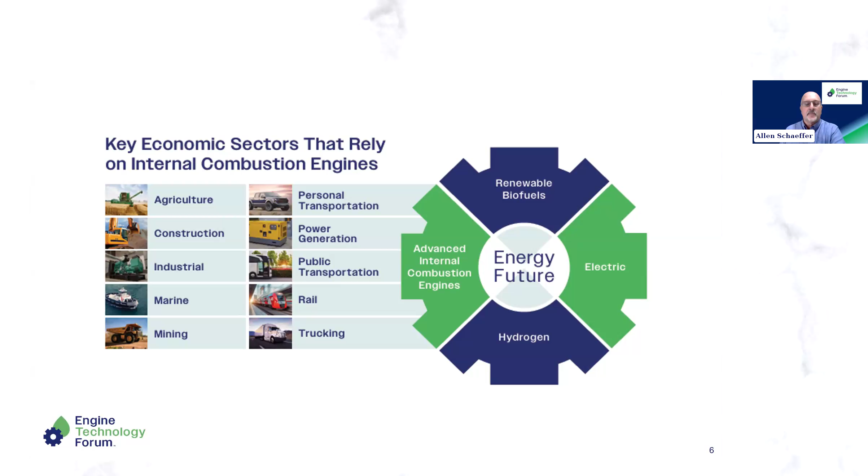And that's because of several reasons, which we are going to get into today, and that is the increased efficiency of the technology, its ability to achieve even lower emissions, and the role that sustainable and renewable fuels play as part of this future endeavor.

Today's session is going to look at three areas. First of all, the fuels, the quality of fuels that we're using, the type of fuels, and a focus on renewable biofuels. We'll also discuss the efficiency that's taking place in engines, components, and their fuel delivery systems, and how it all works together. And then finally, we'll talk about what innovations have occurred in emissions controls to help meet the tighter standards that are happening in the future.

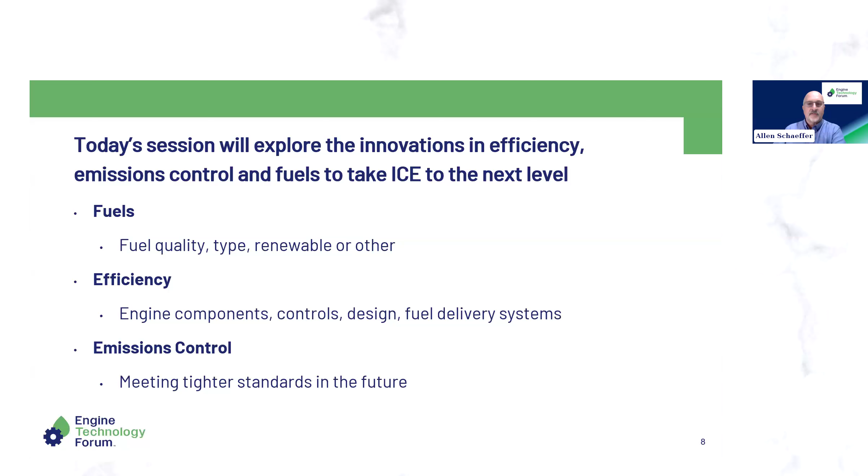So that's the breakdown. We are fortunate to have with us today a great panel representing great companies, and we're going to hear from each of them in just a moment.

We're going to begin with our session on fuels, and for that, our two participants will be Steve Howell, the founding partner of MARC-IV Consulting. Steve is also chair of the ASTM Biodiesel Task Force, longtime chair, and he really is the expert on fuel quality and renewable fuels. We're delighted to have you with us today, Steve.

And then also from Innospec is Mary Derry. She heads up their performance additives group, and we'll look forward to hearing from her just after Steve's presentation. So Steve, I'm going to kick it off with you, and welcome, and thank you for being with us.

Well, thank you, Allen, and thanks to all the attendees here today. I'm going to give you a summary of what's going on in the biomass-based diesel area in a low-carbon, low-emissions future. So next slide, please.

So just to level set a little bit, we have two kinds of biomass-based diesel out in the marketplace today. Both fuels are made from vegetable oils or animal fats, renewable low-carbon feedstocks. The renewable diesel is made through a reaction with hydrogen, a typical refinery-type reaction, hydrotreating and isomerization. It converts the 3-carbon backbone to renewable propane and then converts the oxygen to water. And that fuel is a paraffinic fuel. It's ultra low sulfur, zero aromatics, high cetane, and it meets the diesel fuel specification ASTM D975.

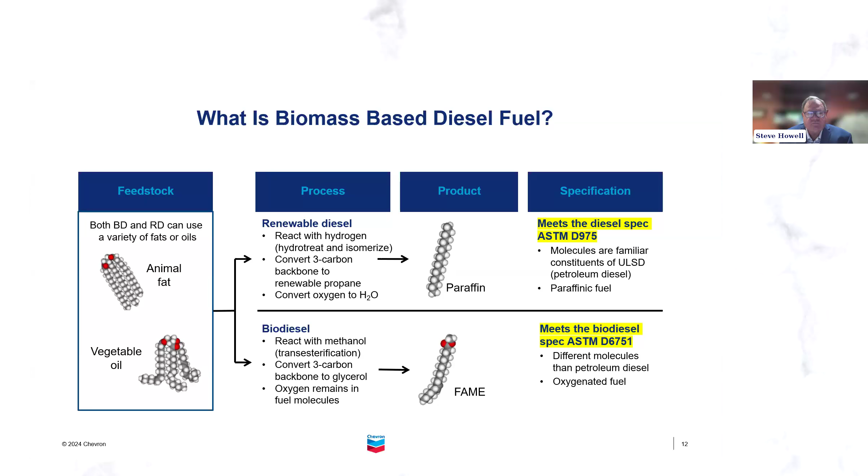A lot of folks may not realize we use a variety of oils and fats to make biodiesel. Soybean oil is about a little less than half. It's the most prevalent oil, but we use all sorts of different oils and fats, distillers corn oil, animal fats, used cooking oils, canola oil. So there's a variety of oils and fats, with soybean oil in the US and North America representing about half the market, and the others spread fairly evenly throughout the rest of the volume of the fuel.

Folks may not realize, but in the early 90s, when we first started the biodiesel area, the main driver for using biodiesel, and now more recently renewable diesel, has been to provide an added outlet for excess soybean oil. When you grow soybeans, it's 80% protein and 20% oil. People actually grow soybeans for the protein, not for the oil. In the 90s, there was an excess of soybean oil, and biodiesel was a viable outlet to use that excess soybean oil. That's really how the industry first started, and a lot of the effort put in was by soybean farmers.

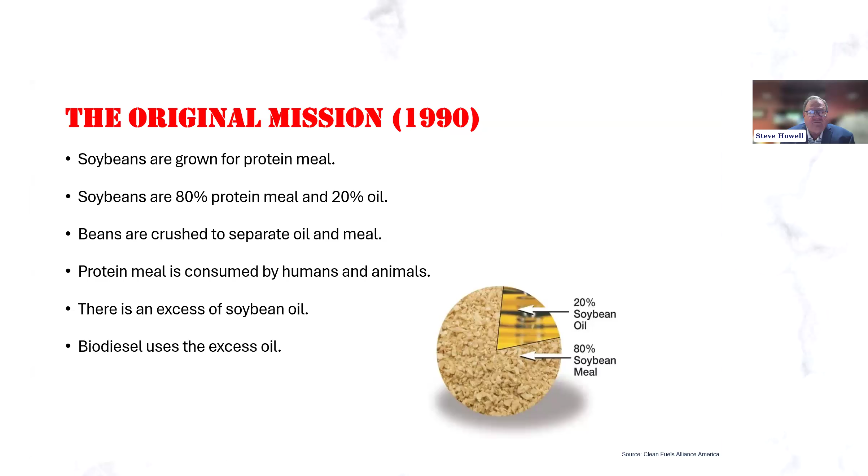By creating a market for that excess oil, you actually make the food portion a little bit cheaper. So that was one of the other driving forces.

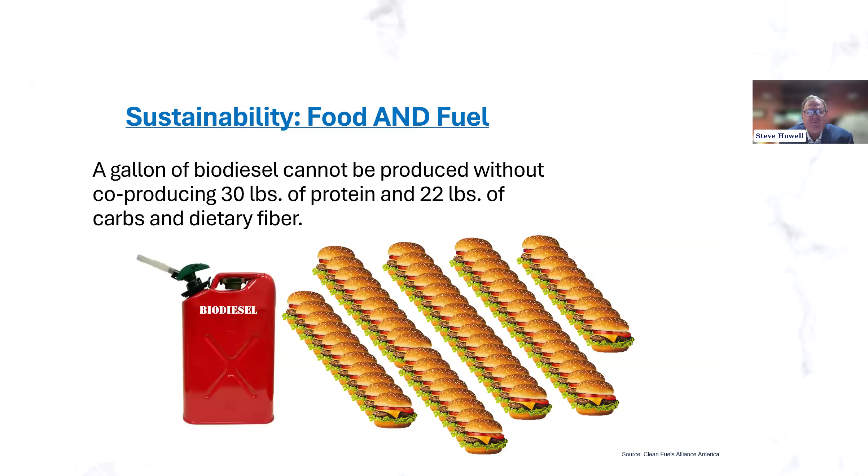Folks may not realize, but you can't produce a gallon of biodiesel without co-producing 30 pounds of protein and 22 pounds of carbs and dietary fiber. So with biodiesel, it's a very sustainable market, sustainable industry for food and fuel. When we grow protein to feed the world, you get more fat than we can eat, and those byproducts can be used to make high quality biomass-based diesel. As long as we have people on the planet, we're going to have excess oils and fats that we can turn into usable, low carbon, high quality diesel fuels.

Some of the early driving forces for our industry were energy security and economy. Over the past 30 years, we've seen those driving forces change, but those are still out there. Reducing dependence on foreign oil is not as important now as it was early on in the industry, but adding jobs and adding refinery capacity were all drivers for the industry.

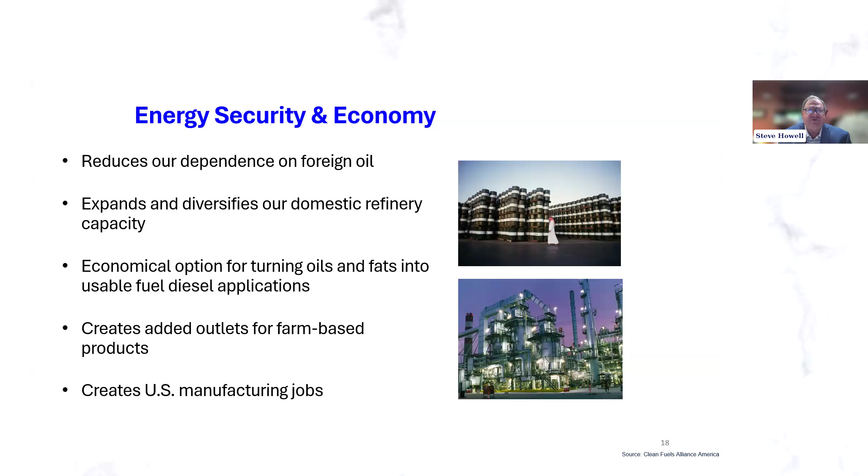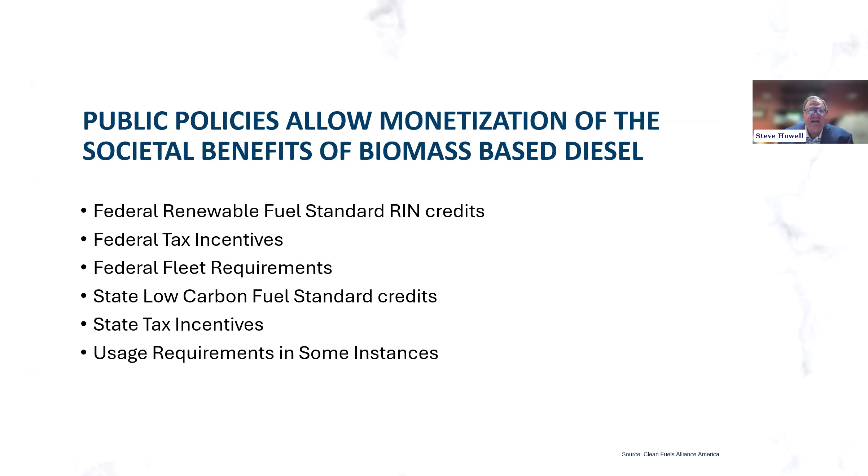The way that the industry captures those forces is through public policies. Public policies have helped monetize those societal benefits of biomass-based diesel fuels, whether they're renewable fuel standard type credits, tax incentives, or low carbon fuel standard credits. Those credits and those policies have allowed the industry to thrive.

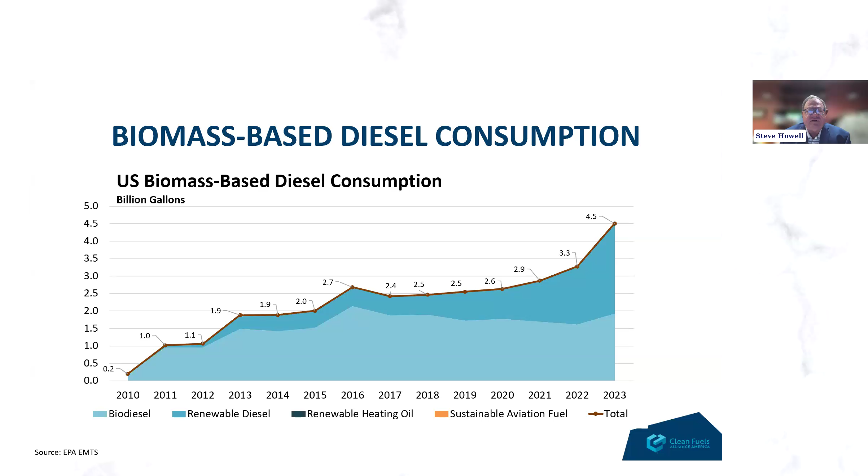The industry has really increased in consumption, particularly over the last 15 years. In 2010, we were making about 200 million gallons of fuel. Last year, we made over 4.5 billion gallons of fuel, and we've seen renewable diesel start to see market penetration. We're right around 50-50 renewable diesel and biodiesel in North America here today.

The 4 billion gallons we're producing right now represents just a little over 10% of U.S. distillate demand, and it's growing. Folks may not realize how much we've really progressed as an industry. Over 70% of the market in California is actually a combination of biodiesel and renewable diesel fuel, due to the low carbon nature and the low carbon fuel standard in California. So folks may not realize how much our industry has progressed and the innovation that's happened in our industry.

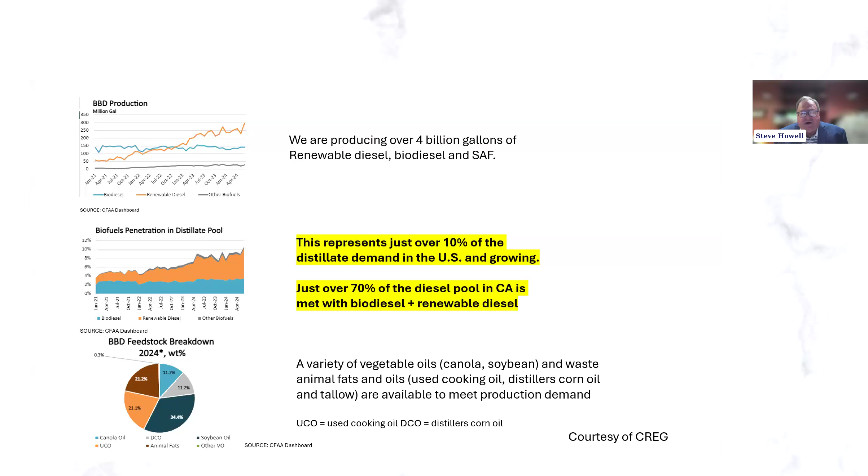The driving forces for our industry are changing. The major driving force now is carbon. When you look at biodiesel, biomass-based diesel, the energy from the sun grows and takes CO2 from the air, grows an oil or fat. We take that oil or fat and burn it back into the air. There's a net life cycle reduction of carbon in the atmosphere of about 70%. We assume that all of the energy used to grow and produce the fuel comes from a fossil source. So as we decarbonize the fuels and as we decarbonize energy, that life cycle CO2 decrease will approach net zero.

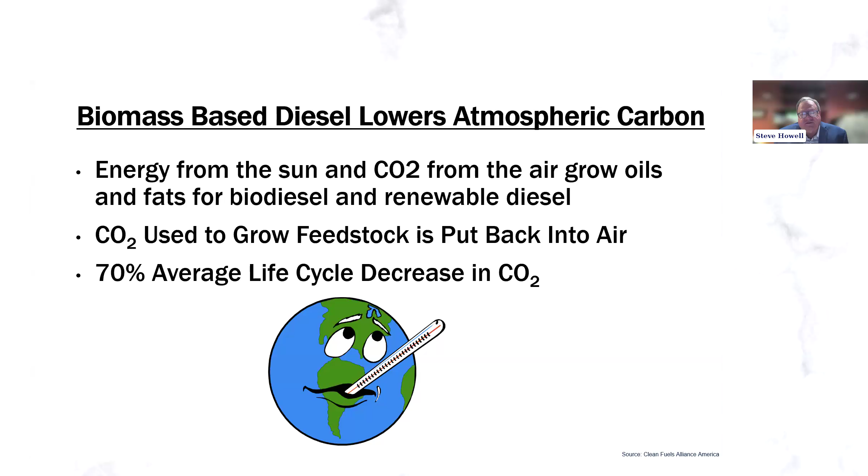We really look at biodiesel, or biomass-based diesel, as liquid solar energy, because the energy from the sun is growing the fuel, and we store it in a fuel rather than a battery. So a very good, forward-looking industry.

One factor that's becoming more recognized is the time value of carbon, or why reducing emissions now is essential. Carbon builds up in the atmosphere—the carbon we release today is still there next year, and the carbon released the previous two years is still there too. There's a compounding nature of carbon in the atmosphere, and for every 5 years of delay, we have to reduce 13 times more carbon emissions to have that same climate impact. That's part of the reason our fuel volumes grew so much over the last year.

As we desulfurize diesel fuel, one advantage of biodiesel is that it improves lubricity. The oxygen in the fatty acid methyl ester that makes up biodiesel actually improves lubricity. When we took the sulfur out of diesel fuel, both renewable diesel and conventional petroleum fuels need some sort of lubricity additive, and biodiesel can serve as that additive. More lubricity means less wear on engine parts and fuel pumps, so combinations of these fuels are really taking off and seeing market penetration.

As we desulfurize fuel, the engine technologies—which you'll hear more about during this call—now achieve most of their emissions reductions through aftertreatment systems, and sulfur reduction has made those aftertreatment systems possible. We've designed the ASTM specifications to ensure those aftertreatment systems work long-term. Every time there's a change in aftertreatment systems or in fuel, the industry does a lot of research to make sure the fuel specifications are right, so engines produce the emissions they need, fuels last long-term, and aftertreatment systems last long-term.

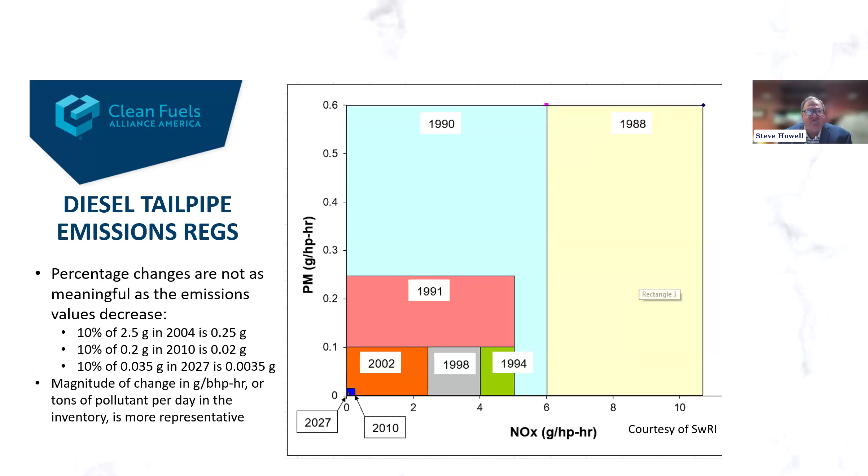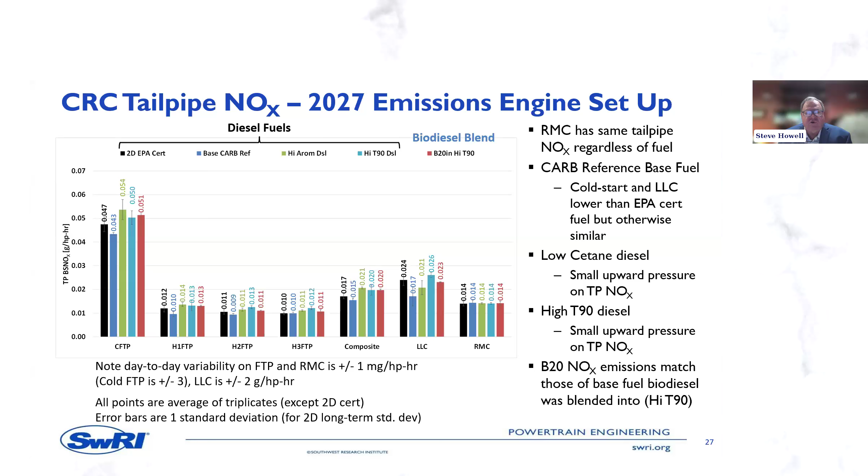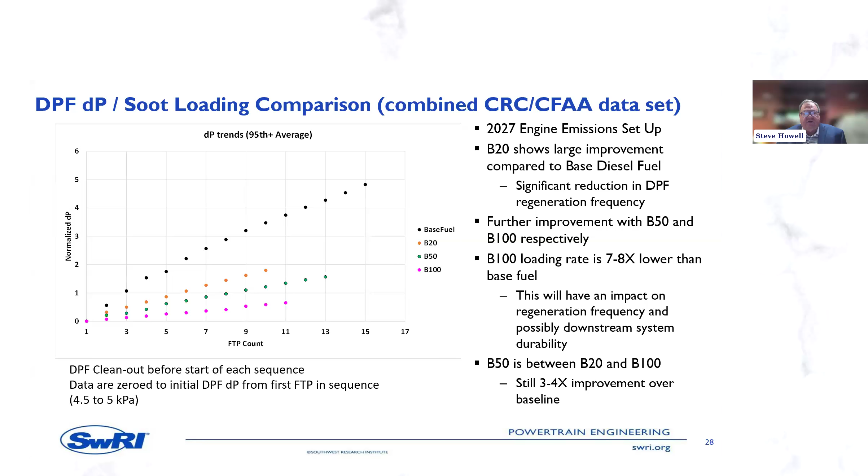The long-term industry vision is 6 billion gallons by 2030 and 15 billion gallons by 2050. We're looking to grow this industry.

We have enough additional feedstock capacity to produce about another 1.8 billion gallons right now. We're looking at expanding yields from vegetable oils, expanding domestic crush, expanding used cooking oils and other products, and novel applications. Over the last 100 years, since oils and fats are a minor byproduct of producing protein, the agricultural industry has tried to minimize the amount of oils and fats produced. Now that we have demand for low carbon fuels, how much larger could we be? If that technology is turned on its head to maximize oils and fats instead, how much larger can we be? We're looking at doing that right now.

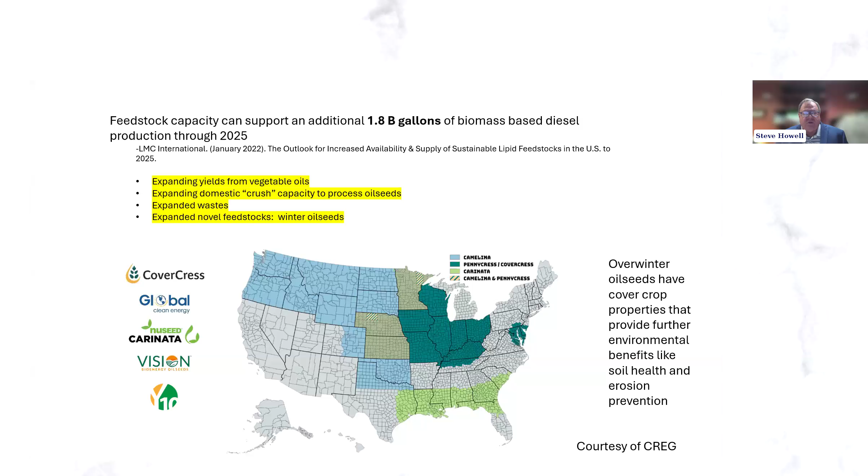To summarize, the takeaway message on the fuel side is that there is real value in reducing life cycle carbon now and not waiting—for every 5 years we wait, 13 times more carbon reductions are needed.

The new engine technology is going to reduce NOx and PM to near zero levels, regardless of the fuel, so tailpipe emissions are going to be reduced. And the atmospheric carbon, the low carbon nature, we reduce that 70% today, and we're going to approach net zero as the fuels and the power used to produce them are decarbonized. Our industry is doing the work so that B100, renewable diesel 100%, or some blend of the two, will be viable options for low net carbon combustion in 2030, 2050, and beyond. So that summarizes my information for you. I hope you found it useful, and back to you, Allen.

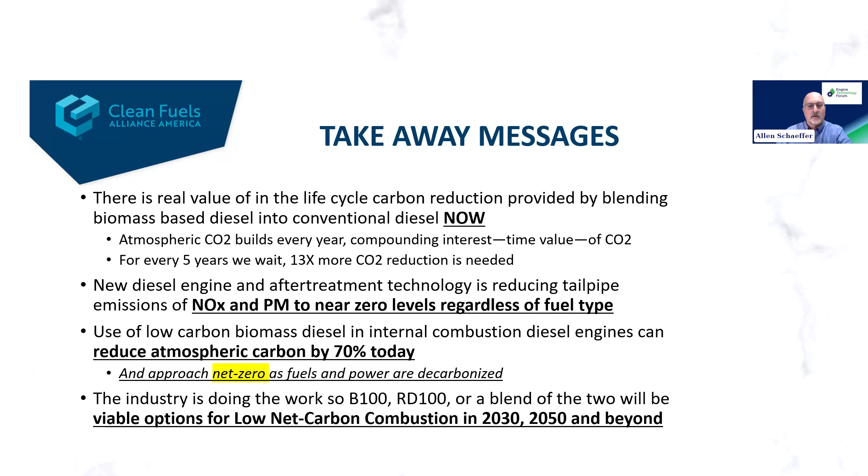Thank you very much, Steve. That is quite a story. As we all know who are working on these issues every day, the importance of sustainable, renewable fuels is a key part of the future for internal combustion. So thank you for that. Let's turn now to what's happening relative to fuel quality, and that is a key part of the whole equation here, both customer satisfaction of the engines as well as the performance and compliance with engine standards. So here to share that insight with us is Mary Dery, and she is with Innospec. So Mary, welcome, and I'm going to turn it over to you.

Thanks, Allen. Can everyone hear me okay? Hello, my name is Mary Dery. I'm the Director of Performance Additives here at Innospec Fuel Specialties. A little bit about our company: we are a global company, with around 2,100 employees scattered across the globe. I happen to be in Newark, Delaware, at what we call the Pencader site. Our focus really is fuel specialties. We've been making fuel additives for quite a long time, but Innospec also has two other divisions: performance chemicals, which covers cosmetics, healthcare, and personal care, as well as oil field services.

As Allen mentioned, I'm here mostly to talk about diesel and heavy duty diesel. Over the years, they have lowered the sulfur content of diesel for good reason, as it was creating a lot of acid rain. Ultimately, they reduced it to 15 parts per million maximum, with some off-road applications able to use higher sulfur diesel. But in reality, all the refineries are making ultra low sulfur diesel, so generally 90% or more of all diesel is 15 parts per million all around the United States. The impact of that is lower SOx emissions and lower acid rain. As Steve mentioned, the lubricity and oxidation properties have changed, with benefits including less injector fouling and less particulate emissions in general.

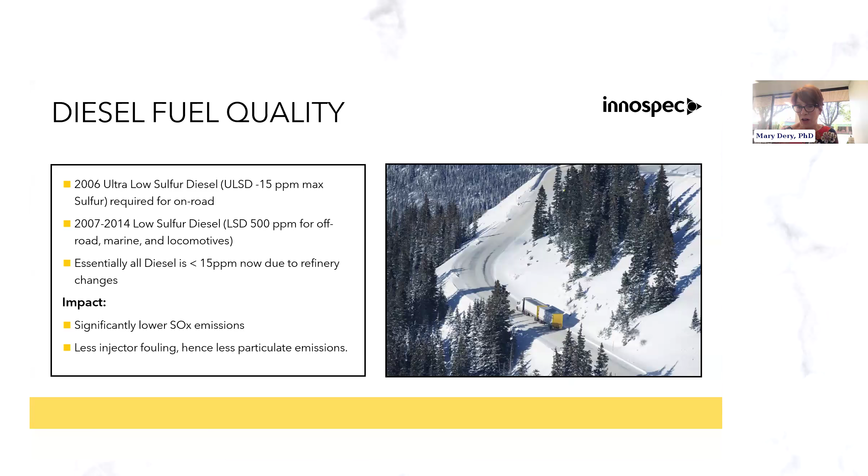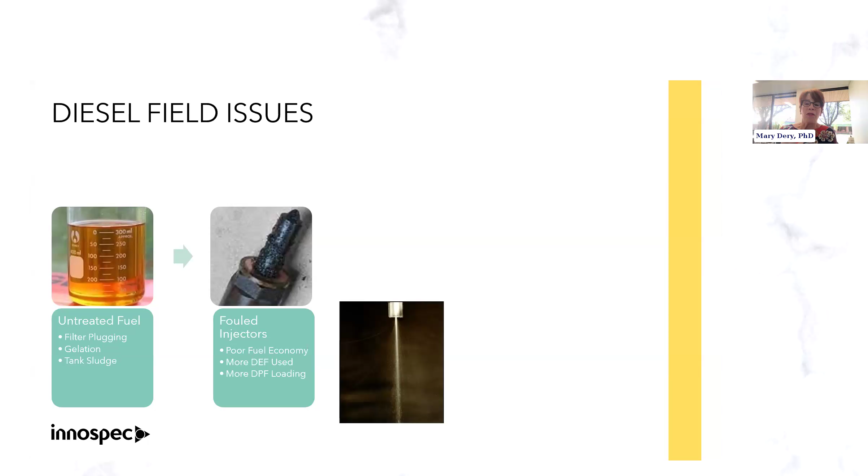But what we see as a fuel company are field issues even with ultra low sulfur diesel. If you have an untreated diesel fuel, you'll get reports of filter plugging, gelation, and tank sludge. With that comes injector fouling, and you'll get quite a lot of deposits, not only on the outside of the injector, but in the little holes that spray the fuel. As you can see in that picture on the right, the fuel is coming out as a direct stream, not like an aerosol spray. That means your fuel is not going to combust properly in your combustion chamber, which leads to poor fuel economy.

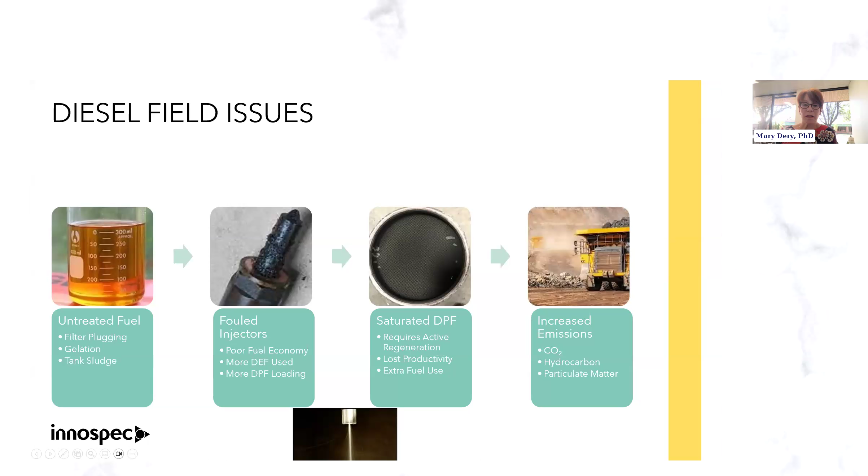It ends up making more particulates, as you see here in the DPF. You'll have lost productivity because you have to regenerate that DPF more often, sometimes in a parked idle format where the vehicle actually has to stop working. Doing that, you use a lot more fuel. And ultimately, you're going to use more fuel, which means you're going to create more carbon dioxide. You're going to get a lot more hydrocarbons and particulate matter.

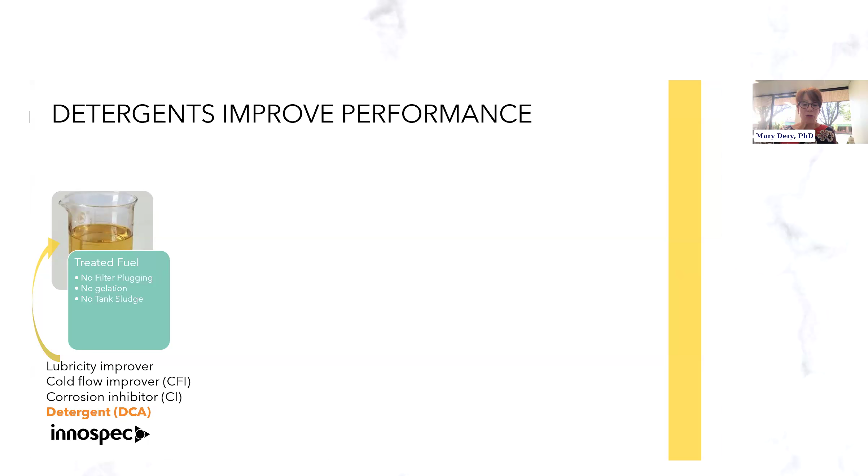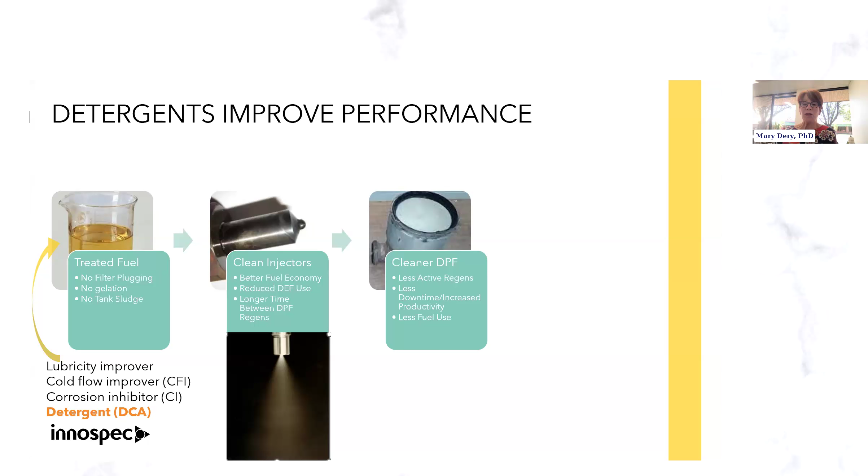A DPF will be cleaner for longer. You'll use less fuel and ultimately less emissions all the way around. Detergents improve the fuel properties and return your engine to the factory design parameters that your OEM has designed your vehicle to operate at.

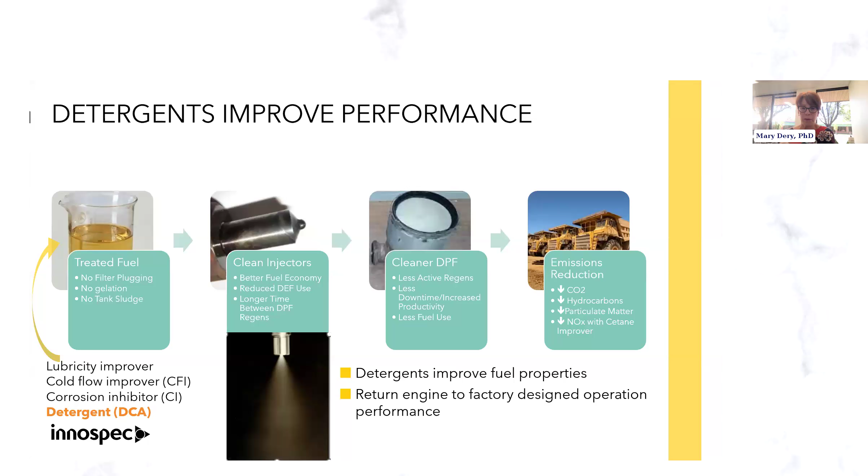Just a little bit about combustion so everyone understands why using less fuel means less CO2 emissions. I'm a chemist, so I think in terms of chemical equations, but I'll keep it simple. If you burn a hydrocarbon in oxygen with complete combustion, you only make CO2 and water.

That is the most complete reaction. But in real life, you're not just burning oxygen, you've got air present, and you make other byproducts.

In air, we have mostly nitrogen, and that nitrogen contributes to the making of smog, or NOx emissions, that's what they're called.

You also make carbon monoxide, which is highly toxic, as we all know. You'll get solid carbonaceous deposits, also known as particulate matter or PM, as well as the CO2 and water.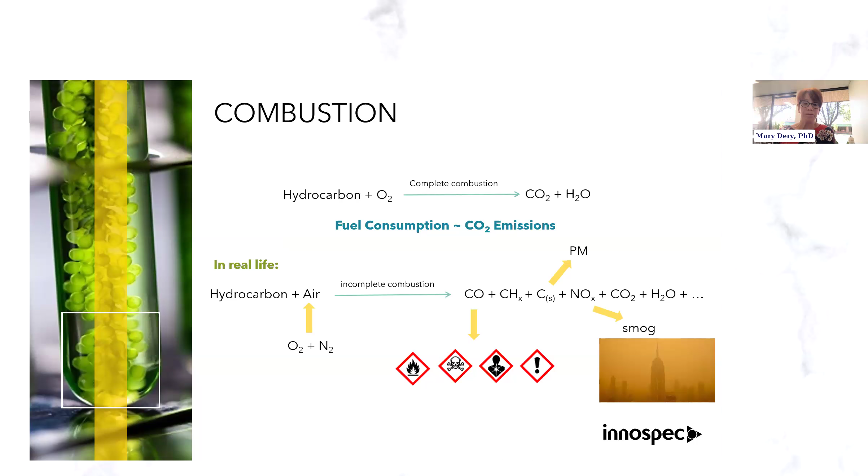Here's an example of how our fuel additives can improve performance in real life. There are standardized tests, but this is about some field trials we've done in recent years.

In this farm tractor trial, we took a tractor that had over 1,800 hours on it and pulled the injectors. If you look at the untreated injector, you'll see deep, deep caverns of deposits in there.

Looks like a volcano. But after only 100 hours of operating on a detergent additive in the fuel, you can see that those deposits around the hole have eroded away.

And with that, we've reduced the NOx emissions 30%. Additionally, we can reduce soot emissions by 30%.

As you can see on the PM 2.5, that's particulate matter 2.5 microns or less, which is very, very small. It's been linked to lung cancer and other pulmonary health issues. We have a 34% reduction there.

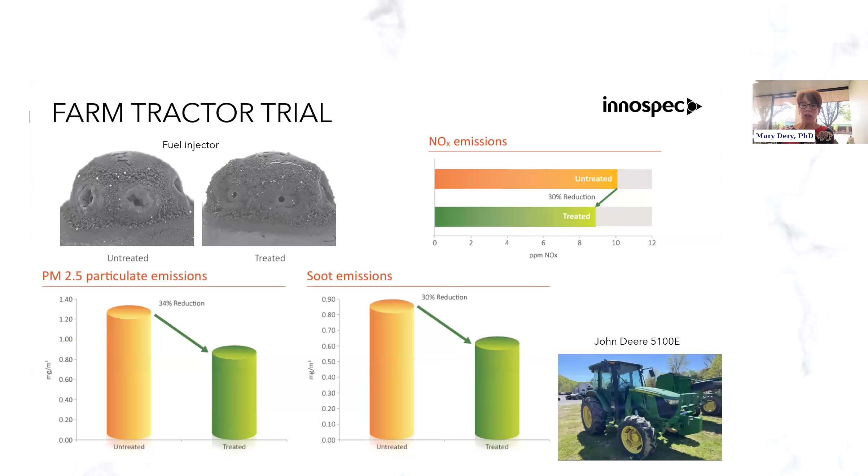In another on-road vehicle test, we took a Sprinter van and did a DPF loading study. We took untreated fuel, ran it in the Sprinter van, and measured how long it takes to saturate the DPF, requiring a parked regeneration.

We had to do some software modifications to make it do that, but we ran it twice, and as you can see, it's pretty repeatable. That's just under 3 hours to load that DPF, requiring some form of regeneration.

Upon adding a treated fuel with detergent control additive, on the first treatment we extended it close to half an hour, and subsequent tanks or treatments extended it all the way out. After 4 trials, we stopped it.

We extended the DPF load time by 77%. We could have run it longer, and maybe that's a future study, but just from the regeneration there was a 1% fuel consumption improvement.

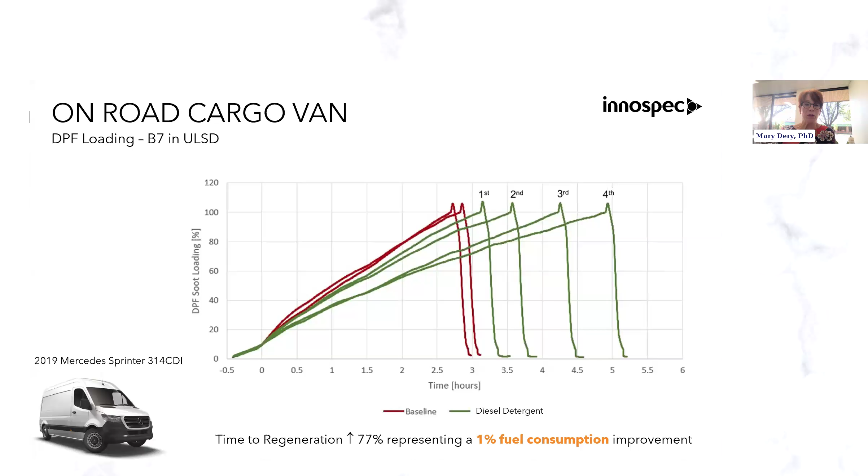We have mining customers, some with underground mines, so carbon monoxide emissions are very important to them. In this trial, we ran 24 vehicles, and for 4 months we ran them on untreated diesel fuel, ULSD.

Then after 4 months, we switched them over to a treated, detergent-treated fuel, and then monitored the fuel consumption again over 4 months, as well as the CO emissions.

As you can see in these graphs, we had almost a 5% fuel consumption savings and a 14% reduction in CO emissions.

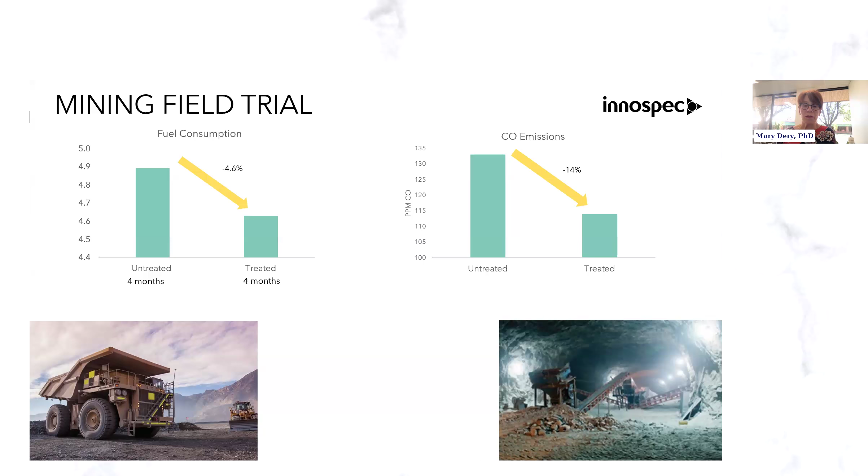Some people think fuel additives are snake oil, so just so you understand, we run many, many trials, and this is just the trials in the Americas. We use statistics to measure the effect of our diesel control, detergent control additives.

As you can see here, we range anywhere from 1% to 17% fuel economy or fuel consumption reduction. We don't say everything gets 17%. Obviously, the average of these trials is about 6%.

Typically, when we work with new customers, we say anywhere from 2.5% to 5%. And all that translates into carbon dioxide savings.

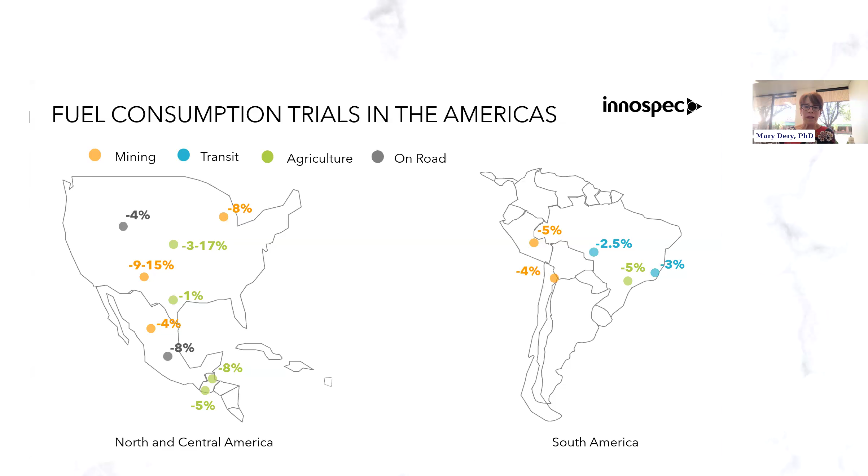So what can an owner operator or fleet owner do today to save on CO2 and meet the new requirements? They can take their existing vehicles, no fancy technology required.

They can use biodiesel in combination with a diesel detergent to get significant CO2 and particulate matter reduction.

And how that works, and we heard a lot about this from Steve, thank you, this was a natural segue.

If we look at the carbon intensity of a variety of fuels, diesel and gasoline are at the top, about 100, and biodiesel and renewable diesels are down by around 30. Of course, that all depends on how the fuel is made, where the feedstock comes from, what energy source they use. It's a bit of a complicated formula, but you can essentially save 70% in CO2 by switching over to biodiesel and renewable.

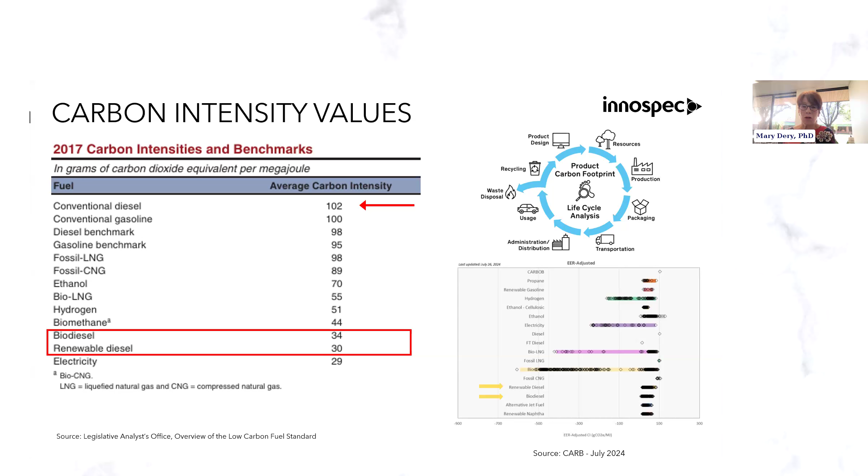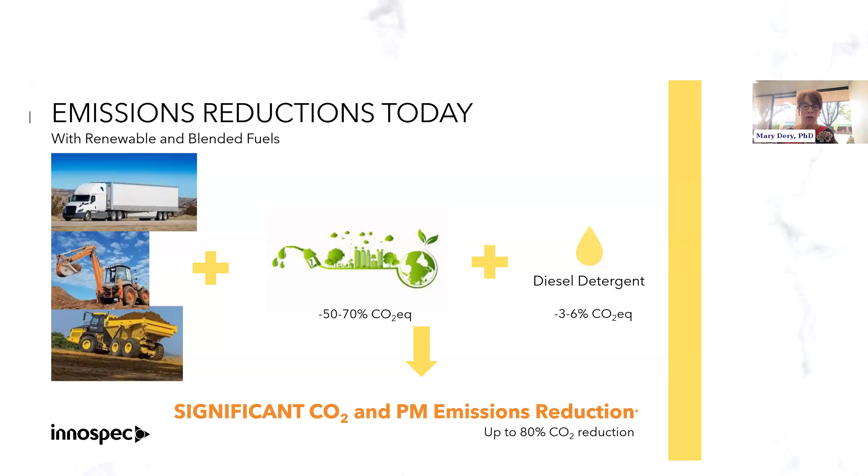If you combine the biodiesel or renewable diesel with diesel detergent, you'll have a 50 to 70% reduction in CO2 with the biodiesel, another 3 to 6% savings with your diesel detergent, and now we're talking 80% reduction in CO2 emissions. But let's talk a little bit about renewable diesel.

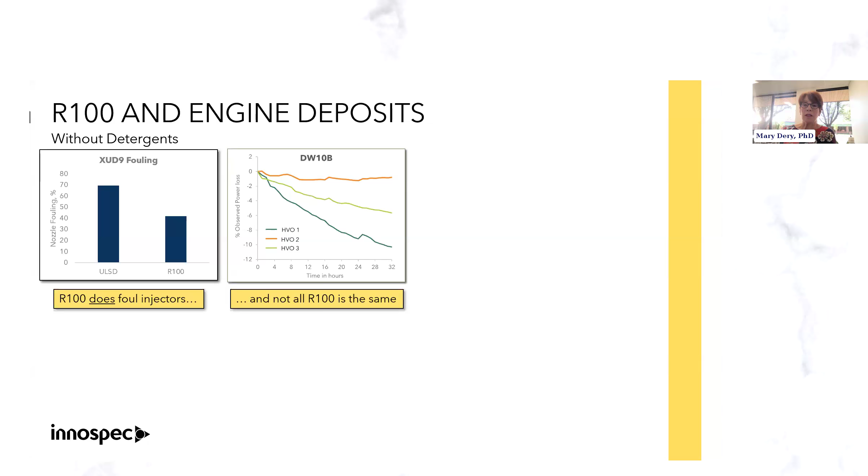And in the Sprinter van, if you remember, the last Sprinter van study using ULSD fouled in about 3 hours. This is 4 hours. That's better, it's performing better than the ULSD, but it does foul. It does saturate that DPF.

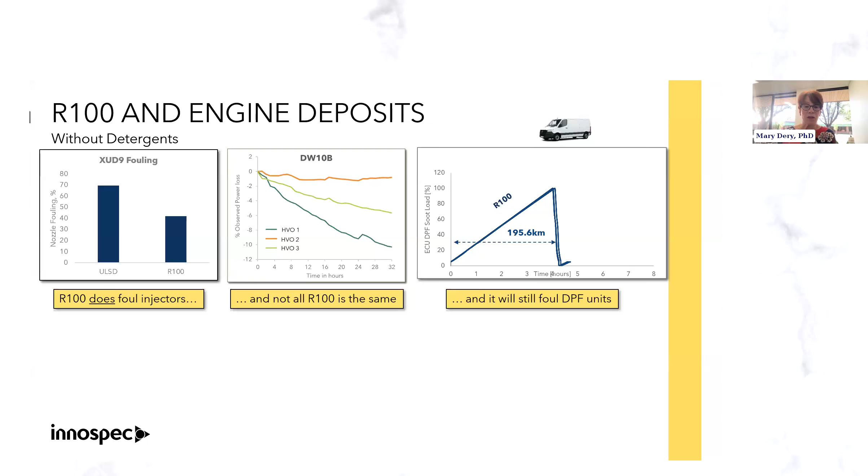So now if we add diesel detergents, you can see that we're pretty much eliminating any fouling in the XUD9 test. We're restoring the power even with the worst HVO.

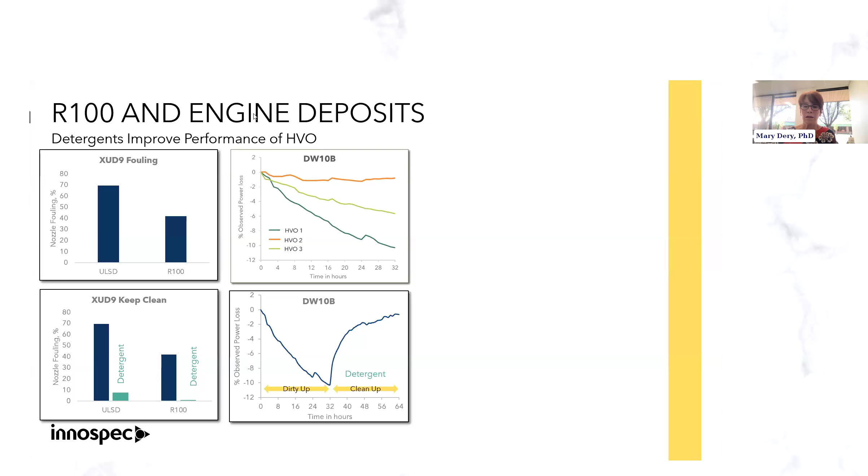And in the Sprinter van, it takes a while for this to load for some reason. Did you hit it? Oh, we have a pause. Yeah, sorry, there we go. No worries.

We were able to increase that saturation time to 7 hours. Again, it's 70 to 80% longer, and in this case we have a 2.7% savings in fuel consumption.

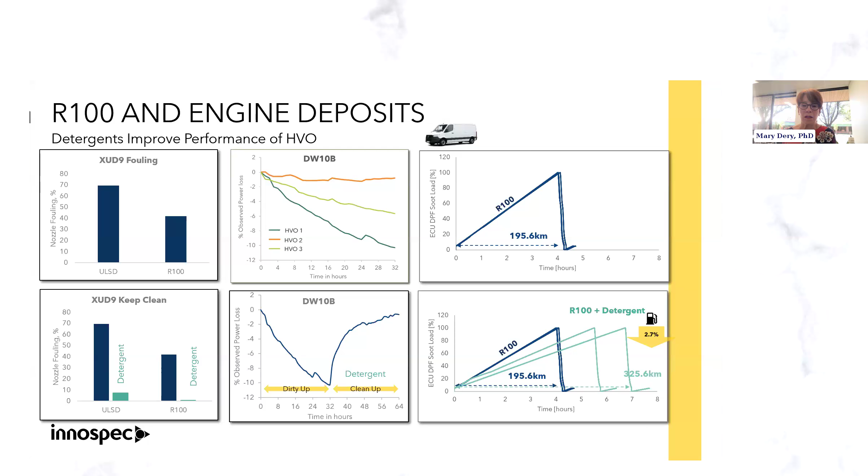So finally, in conclusion, basically we all know that regulations are getting stricter, reducing emissions for all vehicles, but one can reduce emissions significantly through their fuel choice and adding fuel additives to reduce those emissions even further. Steve told us that renewable fuel volumes are insufficient to meet our needs today, but by using diesel detergents, you can help keep your engines clean and optimize your emission reduction as much as possible.

And then the one last piece is renewable fuel, or R100 or HVO. It does cause fouling issues. It's not necessarily the best thing since sliced bread. Not all are the same, and diesel detergents will help keep their performance working wonderfully. So thank you very much for your time, I hope you learned something today.

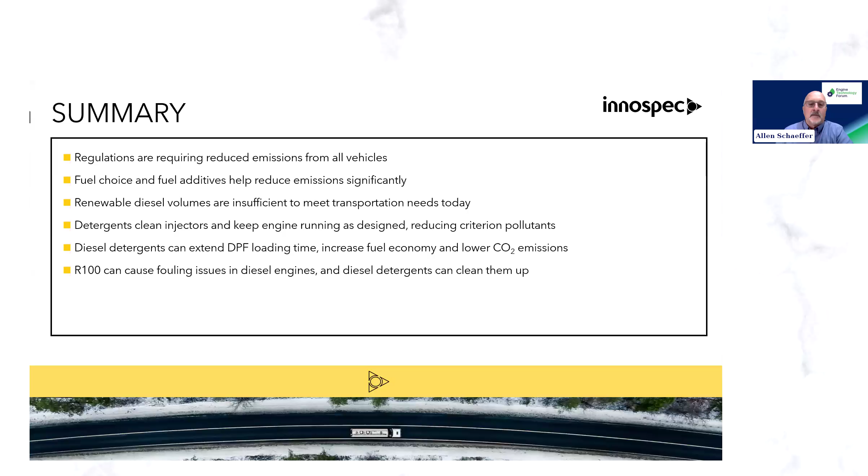Okay, we've talked about the fuel. Let's get into the engine and find out what's going on in there with regards to efficiency and how we ensure the future of internal combustion. And for this part of the program, we have two experts with us. Welcome to Ivan Tate, who's head of the Technical Center at Fiat Powertrain Technologies, and welcome to Srinivas Gunturu, who is the Chief Engineer at Stanadyne. Ivan, we're going to start with you, take it away.

Okay, hello everybody. So it feels like a consecutive presentation for me, so I'm not going to go into our company's history or product range too heavily. But I will remind everyone, FPT is a global powertrain company. We produce nearly 500,000 engines a year, and also over 250,000 powertrain components, such as transmissions or axles.

And it's easily the most exciting time within our industry, I think, since its inception. We've got a lot of options coming on the table, a lot of customer acceptance to those alternatives, regulations changing dramatically, and also facilitated by technological improvements and availability.

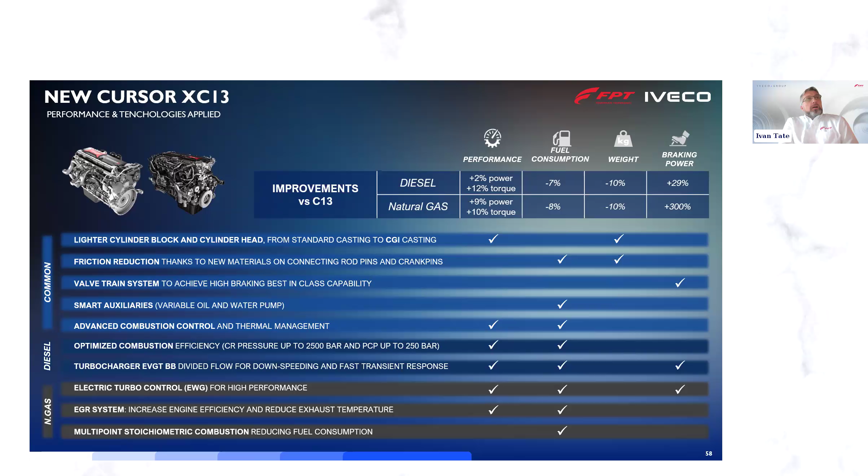The tractors are particularly interesting. They can both work steady state, high RPM on PTO work, and have very high transient capabilities, but equally, they also have some very low load emissions when they're used off season, because they're a large investment for the end user. It's a bit like taking a Class 8 truck to the supermarket - just because you own it, that kind of work happens with the tractors on the farm.

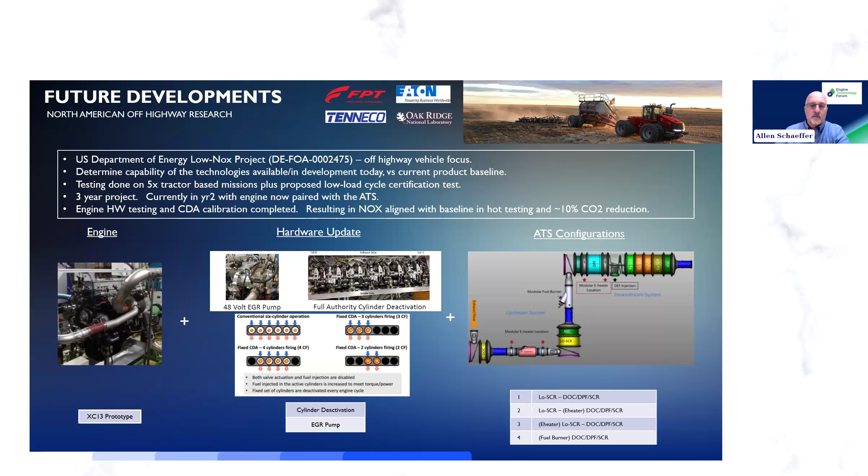Thank you, Allen. Good morning, all. Good morning, good evening, good afternoon. I know there are a lot of people from around the world joined. So my name is Srinu Gunturu, and I'm the chief engineer for Stanadyne.

Just to give you an overall view of who we are, we are a fuel system company enabling clean propulsion through engine innovation in the fuel system, bridging the gap to zero carbon and reducing ICE carbon emissions. We specialize in critical fuel and air system components, off-road and on-road. We're also in ICE propulsion for low carbon liquid fuels and gaseous fuels, including hydrogen. As part of bridging to zero carbon, we do remanufacturing to support the circular economy and sustainable propulsion globally, to make sure we provide to the industry and the market. We also have a global presence overall to support the local markets around the world.

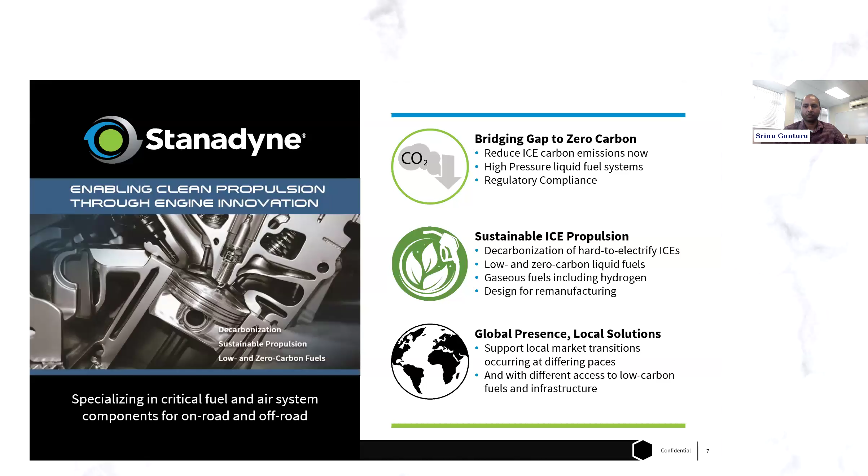With that, next slide. I know a lot of other people have already discussed some of the fuels like bio, liquid natural gas, and diesel. Now I'm going to talk about liquid propane, which we believe is going to be a great alternative, increasing the efficiency of the current liquid propane port fuel systems available in the market. We also see that direct injection is going to have huge efficiency improvement and improved emissions. As you can see, the octane rating of propane is around 105.

And using the three-way catalyst, we can probably reduce emissions even more, with less expensive systems than diesel aftertreatment. Also, because of the liquid propane, you get near zero particulate matter emissions.

As you can see, we've identified that almost 73% of 2023 model year vehicles, this is only in North America, utilize direct injection, up from 37% in 2014. So this will grow even more to have such direct injection compared to less efficient diesel or gasoline port fuel injection systems. So we were trying to help improve the efficiency of liquid propane with direct injection.

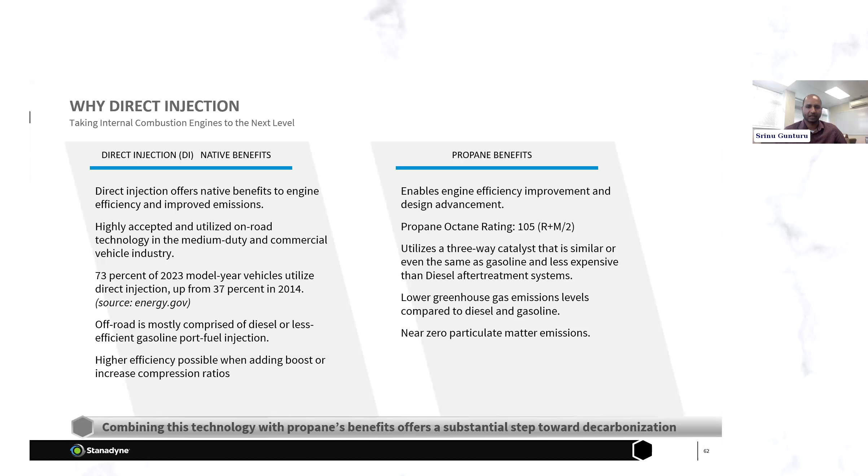Next slide. So with that, during our research and development, with the help of Katech, who's our implementation partner doing the dyno testing, and also working closely with the Propane Education and Research Council diligently, we were able to bring this to the market.

So we did develop a system that we put on a GM platform, which is the L8T engine, with no major modifications from a gasoline engine, directly changing it to liquid propane. We were able to convert and make some smaller modifications on the software and hardware, and to have a vapor lock inhibitor in the system to help fire this engine with liquid propane, with minor modifications from the OEM gasoline platform.

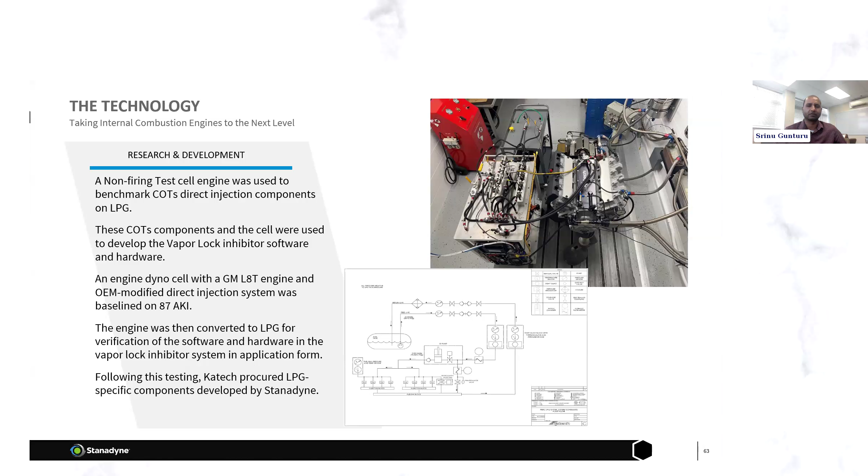Next slide. This is showing the configuration of the L8T engine replaced with liquid propane direct injectors. There are some modifications to the design of the propane pump and the propane injector. We have a bit more flow from the propane injector, and we've made design modifications to eliminate the vapor lock issue we had, along with smaller modifications, but the engine was operated as in OEM form.

You can see the performance compared with the gas GM 2500. The torque of the GM 2500 is around 460 foot-pounds. Let's go to the next one.

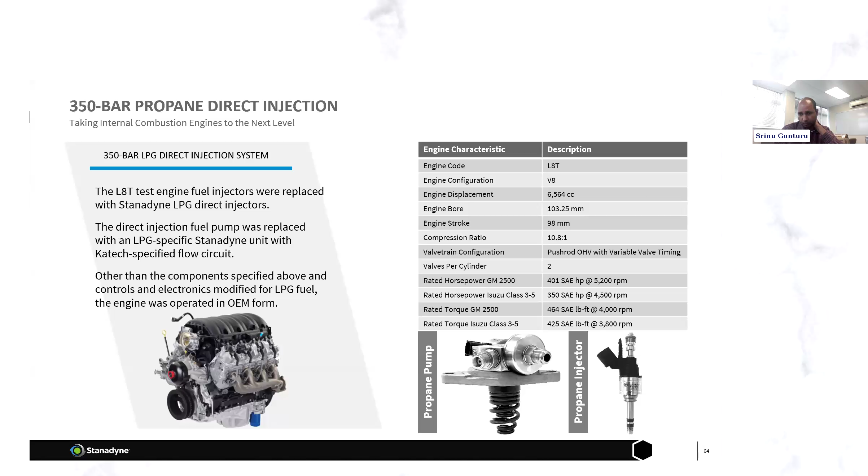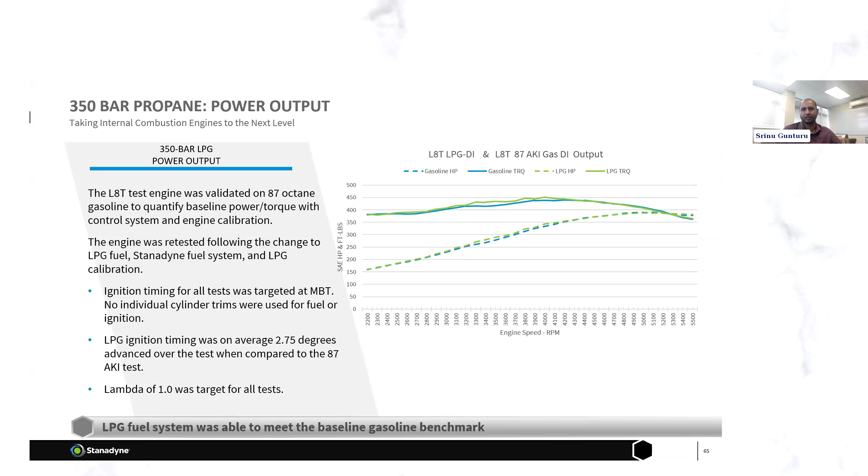With that, we had baseline the L8T engine with the gasoline, and also we modified the engine with liquid propane. With these modifications, we were able to test the performance of that L8T engine, and you can see most engine speeds, the fuel system was able to meet the baseline gasoline benchmark, or in some instances we have a little higher performance in the region of 3,000 and 3,500 engine RPMs.

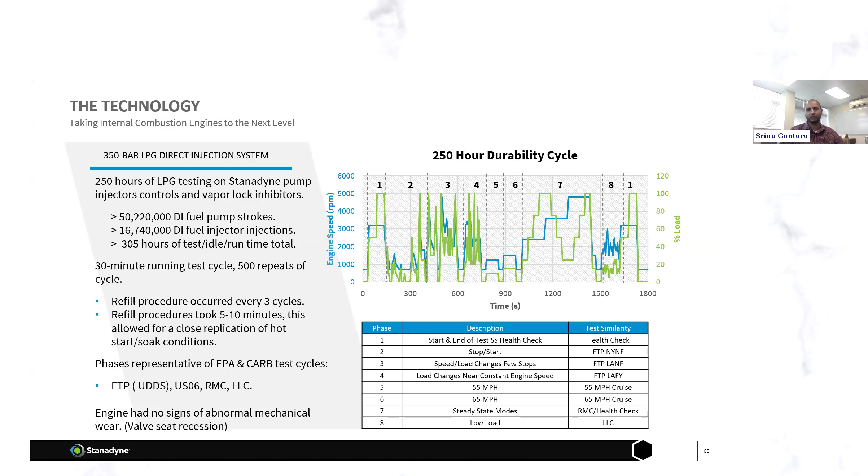And not only running steady state, we ran transient cycles with different start-stop conditions, hot start conditions, as well as 55 to 65 miles per hour cruise testing, to see whether this technology was going to have an impact on the reliability or durability of the engine, and also on the fuel system components.

So as I said, we did have some obstacles during the development of this DI system to be able to test it on a gasoline direct injection system. The main obstacle that we had was the fuel. Propane becomes a gas at ambient pressure, and it vaporizes in the system.

As I mentioned before, we made design changes to our pump and to the system to help with vapor lock with the liquid propane, for the delivery from the high pressure pump, so that the pump won't seize and operates at higher pressures, and so that we won't see that vapor lock.

We also developed a system of fuel rail pressure relief, just in case any vapor forms in the rail, which helps eliminate that vapor and release it back to the chassis side. The injectors were also designed to maintain targeting the base of the engine with some penetration and mixture changes, improving the efficiency of the injector to get a little higher flow for better combustion of the liquid propane in the cylinder.

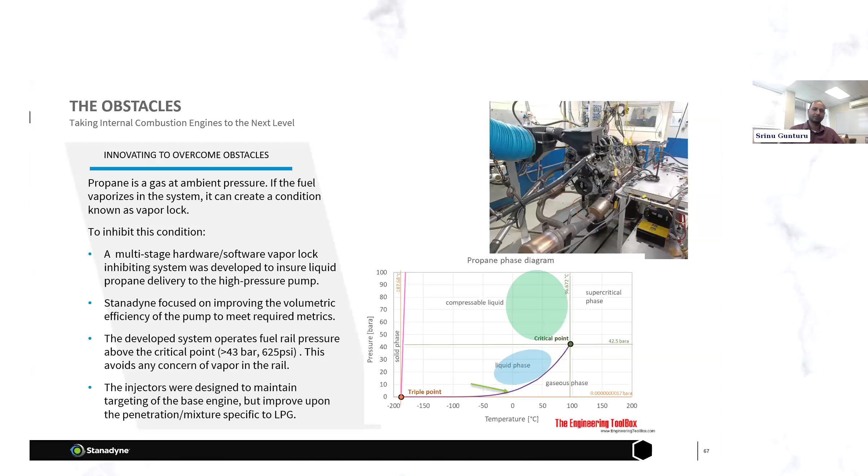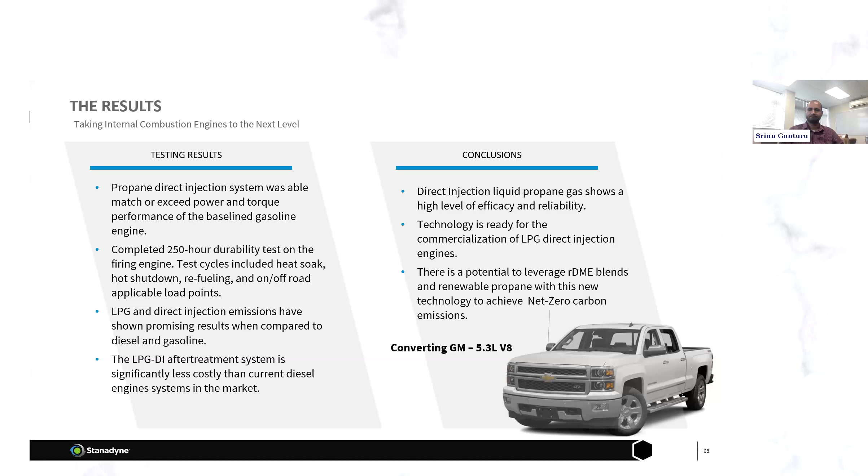Very good. Thank you. Thank you, Srinu. Great look at what's happening in innovation there relative to propane.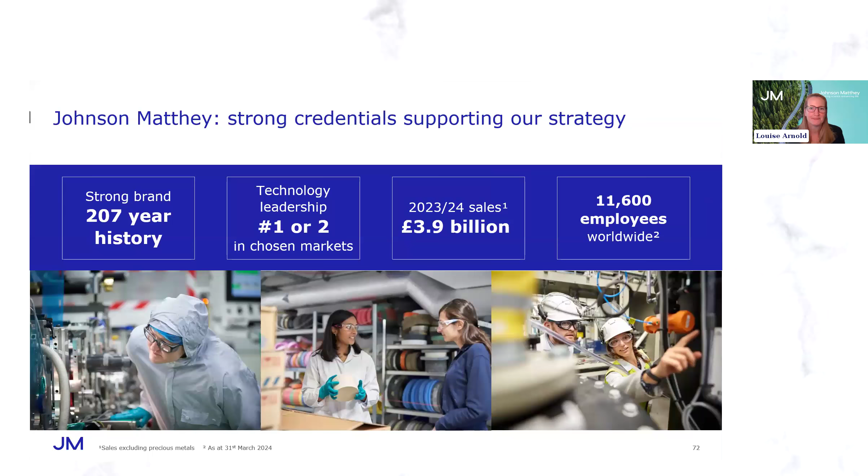So what do we do? We try to always think about sustainability. We're driving down transport emissions, transitioning chemical productions to sustainable processes and feedstocks, transforming energy systems, and really working on that circular economy.

So today we're going to be focusing most on emissions control systems that for us sit in the automotive systems, but we also do components for fuel cells, sustainable aviation fuel, and also some of these renewable chemistries, working on either hydrogen or methanol and syngas to make sure we have the low carbon solutions.

We've prevented roughly 20 million tons of pollutants every year, and about a third of the world's catalysts have been provided by Johnson Matthey. We've been here through this evolution of improvements in engines and fuels, and what that means for the catalyst technologies and the reactions that become available to us as we see this evolution.

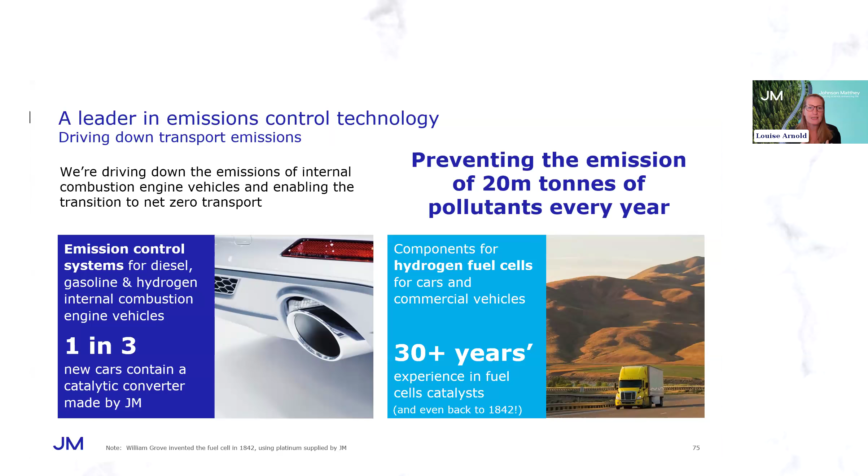So I'm going to say a little bit about gasoline as well as diesel, and Mary in her presentation did a lovely summary of combustion. When you combust hydrocarbons in air rather than oxygen, you get some very different, more complex chemistries coming out. This is what's led to the legislation and fitment of emissions control catalysts.

Why am I talking about gasoline and diesel differently? Because when you burn gasoline fuel, you burn that generally around the perfect lambda 1. So you have ideally that perfect match of available oxygen in your air intake with the amount of fuel you're injecting, and you naturally perturbate as the engine and the injectors fire to get that balance.

Because of this, in a gasoline or similar type engine, we can have one catalyst that does all of the oxidation and reduction chemistries all in one neat package. These three-way catalysts have been around since the 70s, but they've continued to evolve.

As we've improved sulfur, not just in diesel, but also in gasoline, we've been able to reduce the amount of precious metals needed in these catalysts. We've been able to expand the window of other promoters that we can use to maintain the performance over time.

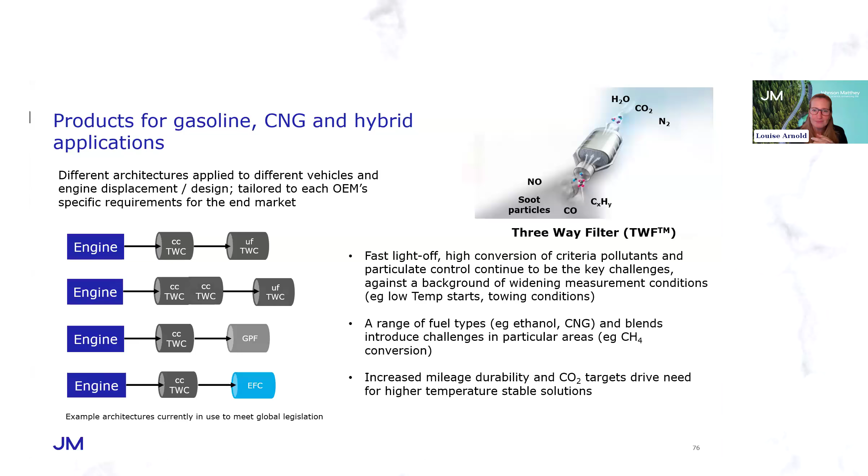So that's a big improvement on both the cost, bringing the cost down, and that in itself reduces the carbon footprint of the product itself, because platinum metals originate obviously from deep underground in very low percentages in the metal, in the rock ores that are mined.

And now we're seeing that we're reducing that costly and high CO2 footprint ingredient, and we're improving the performance at the same time. These are catalysts that have been aged to over 1150 degrees, so they're very thermally durable, and we're seeing great performance.

So that's a whistle-stop tour of some of the innovations in gasoline. If you move to the next slide.

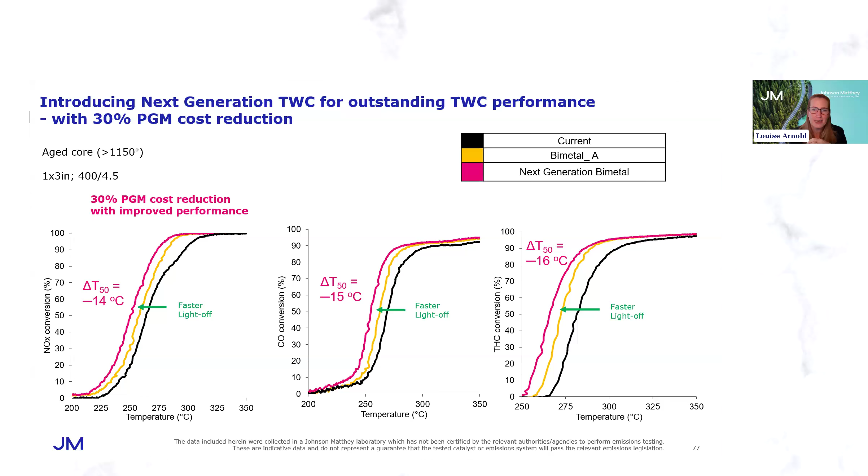Again, I've simplified this because we've had great introductions from Mary and Steve talking about fuels, and some of the after treatment designs Ivan and Shrinu have covered. So really we can continue to improve our formulations and our after treatment. We need to know what's going into the engine and what's coming out of the engine to know what we need to convert and what opportunities we have.

And in some of the new legislations coming in around the world, not just in the US, we're seeing really novel innovations like electrical heating and mini burners. So that gives us more confidence that the temperature will be there for us to do these catalytic reactions and really be able to clean up those tailpipes.

We are getting to the point now that our laboratories have to be so clean and the analyzers so accurate, because we are measuring so close to zero, that it's really a challenge to say whether new formulations are adding significant benefits.

And that's why we focus not just on getting the best package, the lowest volume, the best performance, but also at the right price, not only for the engine or vehicle manufacturer, but then also passed on to the end user. So we continue to develop these formulations.

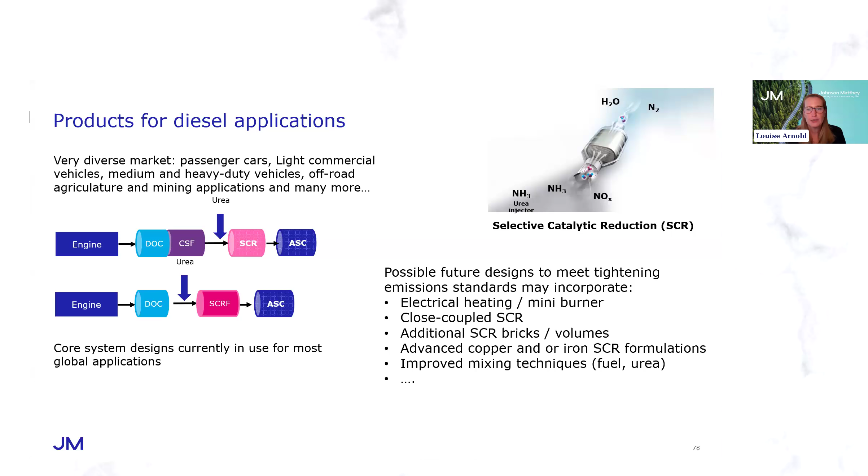A lot of engines now are actually being used as backup power for power grids, the oil and gas industry, and things like data centers, because they really do have a large use of electricity. They do need a backup there to make sure your data is safe in event of a power cut or other issue. So I think that's a very quick roundup of some of the things happening in emissions control. And back to you, Alan.

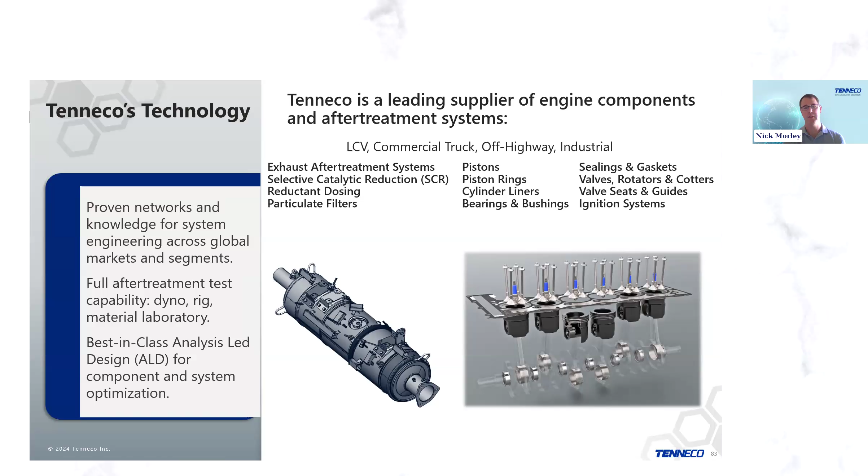So today, I'm going to present some technology packages that take the catalysts that Louise had alluded to, and technologies that enable them to operate at the most optimized temperature ranges. There are several ways to do that.

This menu of technologies presented in front of you is a fuel burner, electric heater, dual dosing, advanced mixing. Burners take the diesel or gasoline fuel, depending on the engine you're dealing with, combusting it, typically with a secondary air pump, because particularly in diesel, you'll need that oxygen to produce an optimized heat stream for the catalysts.

Electric heaters are just that. They're typically resistive heaters, and they produce the heat, not quite as much power as a burner, and they can be a little bit more flexible in their applications.

And of course, dual dosing with advanced mixing is taking maybe an additional SCR catalyst and moving it to where the heat actually resides, which is typically closer to the engine. There are some complex interactions that can result from that.

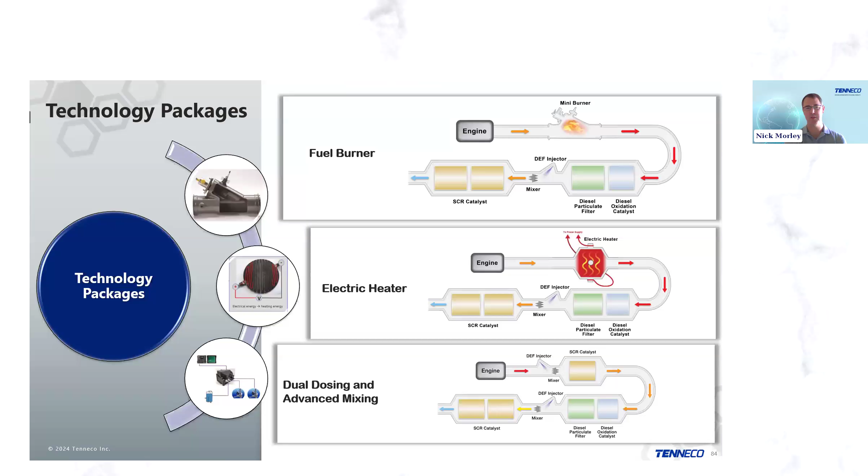to operate outside of your cold start thermal management modes of the engine. If you think about it, the traditional startup sequence would have a cold start of the engine where it's operating in maximum heat up mode, and that can have a detrimental CO2 impact, but operating with a burner can enable them to turn that thermal management off. The result, from testing that has been done, does depend on your test cycle, but you can have CO2 neutrality with a nearly 90% improvement in NOx with a burner.

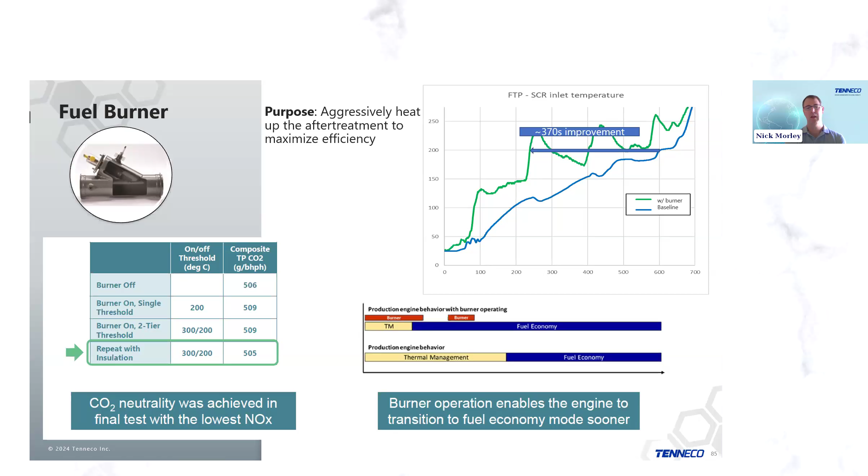If you're not comfortable with burners, electric heaters, if you have 48-volt architectures on your vehicle, can be a very elegant solution. It's a more simple integration versus a fuel burner, and typically it doesn't have quite the heating power—maybe one heater is maybe 1/4 of what a burner could be capable of. But particularly with hybrid applications, and plug-in, it can have near zero impact on fuel economy, just by the nature of the electricity being stored in the battery.

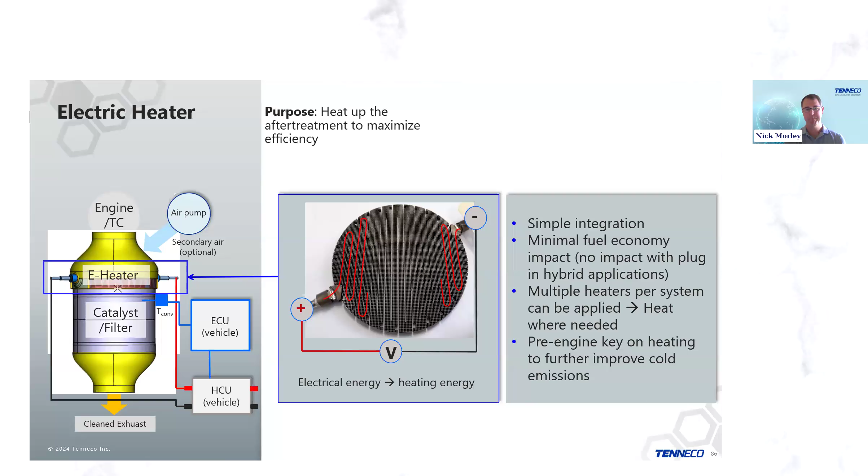If needed, you can apply multiple heaters per system. They can be more flexibly packaged, and placed much closer to the catalyst that needs the heat. In some cases, you can have pre-engine key on heating to preheat your catalyst system before the vehicle starts. This can certainly help with some of those quick start applications, and further optimize your system.

Moving away from active heating, you can move your SCR catalyst a little bit closer to the heat source, splitting the total SCR volume. SCRs are typically used in diesel applications primarily, but the same premise can exist for catalysts with gasoline engines and three-way catalysts, moving it closer to the engine. It does offer a little bit of a challenge when you're looking at packaging, but from an overall perspective, it can be a beneficial choice because this is a known technology. SCR catalysts with urea dosing have been around for a long time, and dual dosing has been in the marketplace in some regions of the world. It does allow for some flexibility in terms of managing your NO2 to NOx ratio. This can be beneficial in passive regeneration. So there are definitely a lot of considerations to be made. This can be more of a comfortable choice.

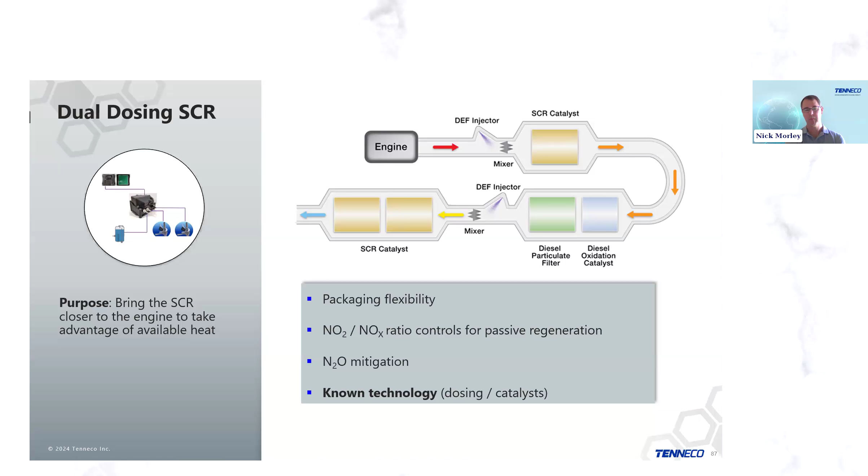As an integrator, our goal was to present a menu of options for our customers. There are a lot of proven technologies, not only in the after treatment space, but in fuels and engine realm, that can allow us to meet our emissions targets both today and tomorrow, not just on vehicle, but even the total life cycle, which is very important. But there are a variety of applications that our customers require, not only end users, but off highway, on highway, pass car. These are all very different applications with very different choices of technology, so it's important to provide that menu of choices. But any of these technologies in any combination should be able to help us meet those emissions regulations moving forward.

So I think that's it, Alan. Back to you.